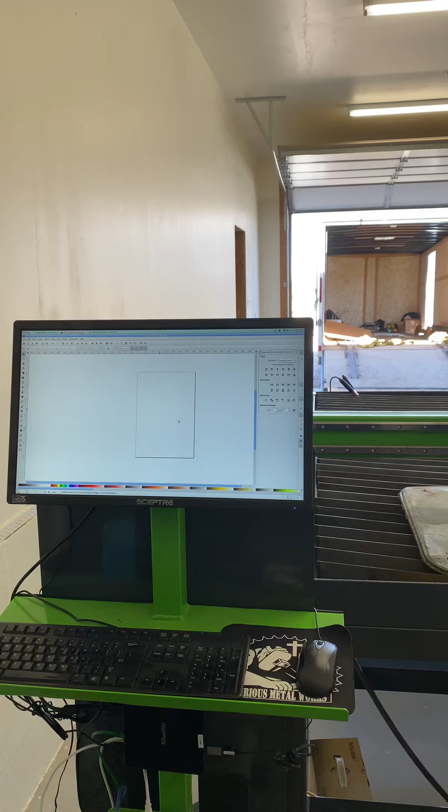All right, so first we're going to go back to drawing. Let's just draw something simple. Grab your square tool, click and drag. It doesn't really matter what it looks like because we're going to go up and dimension it now.

So corner tool, go up to the top. We're going to tell it that we want to cut in inches. Let's just make a 1 inch square. Tab 1, there's your 1 inch square.

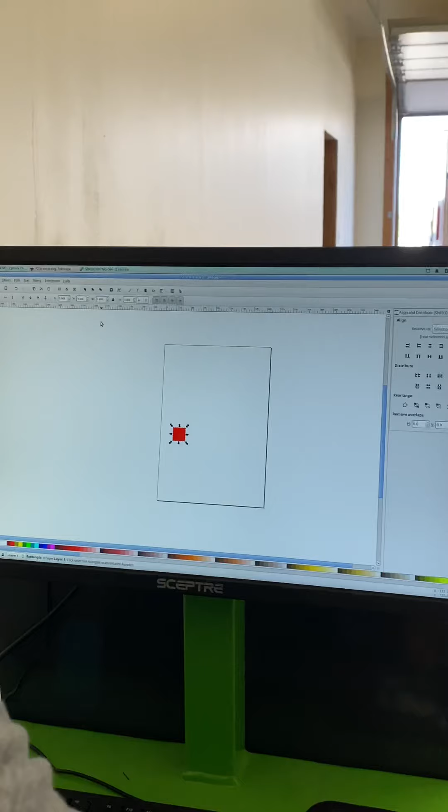And then we'll put a 1/2 inch circle in the middle of it. Grab your circle tool, click and drag, corner tool, width 0.5, height 0.5, enter. Your plus and minus buttons over on the keypad will zoom in and zoom out.

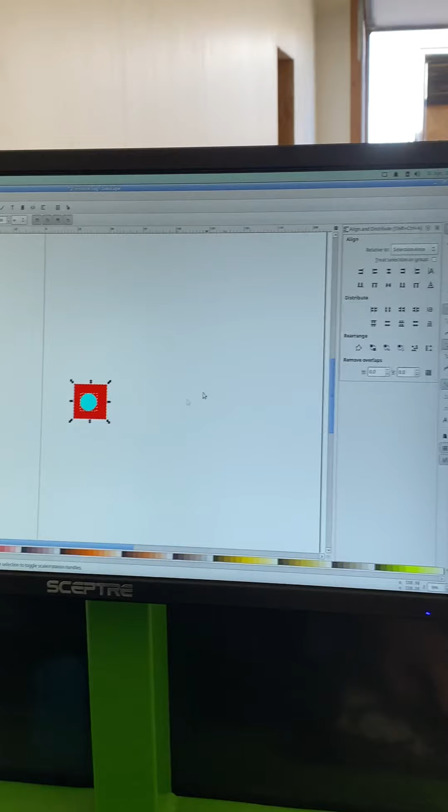Since we have this circle, we're going to change the color of it, make it blue or something else, stick it in the middle, and then we'll draw a box around it. Our align tool is open on the right side, so we're going to center on the vertical axis, center on the horizontal axis. Now it's dead center.

Now we have a 1 by 1 square with a 1/2 inch hole in the middle of it. Go back to File, Save As, and we're saving this in the Plasma Cut Files folder. We're going to name it 1 inch square with hole, .svg. So this is your SVG file, hit save.

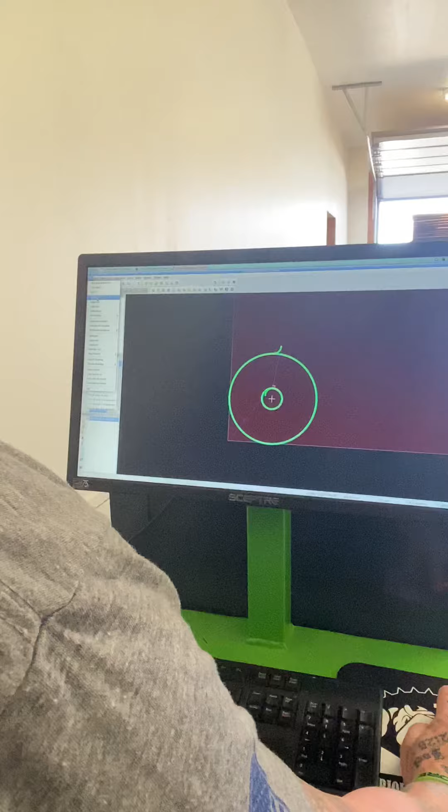Go back to Sheetcam. We'll go to File, New Job, since we're making a new cut. We'll go to File, New Part, and then in Plasma Cut Files, there is your 1 inch square with a hole .svg file. Click it and hit open.

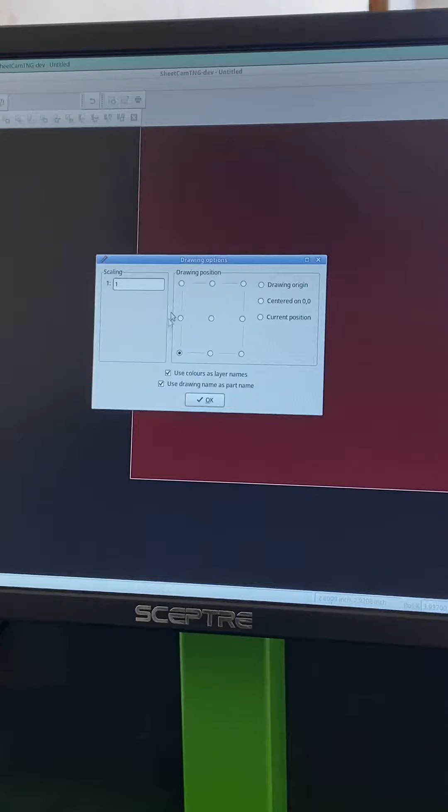This screen asks you where you want to put that part on the plate, on the sheet. We're cutting off the lower left-hand corner. SVG scaling is always 1:1. Hit OK, so there's your part.

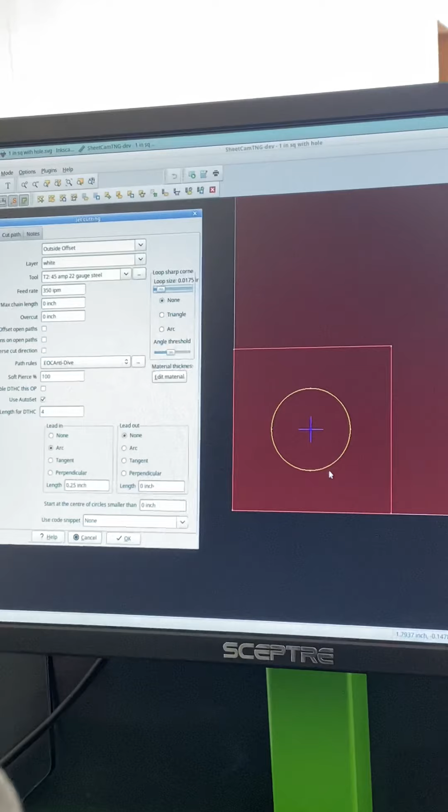Now we're going to go over here to create a new jet cutting operation. We will select outside offset. Sheetcam sees this as 2 parts. The circle's yellow, the square is red. So if you select outside offset, it will automatically do an inside offset on the circle and automatically do an outside offset on the square for you. So we leave it at outside offset.

We'll pick the layer that Sheetcam put it in, which is white. We're cutting 22 gauge steel, so at 45 amps. We need to know what the preset voltage is, so we'll just click this 3 dotted box here. Look over here, it's calling for 128 preset volts. So now you know that number, keep that in the back of your mind.

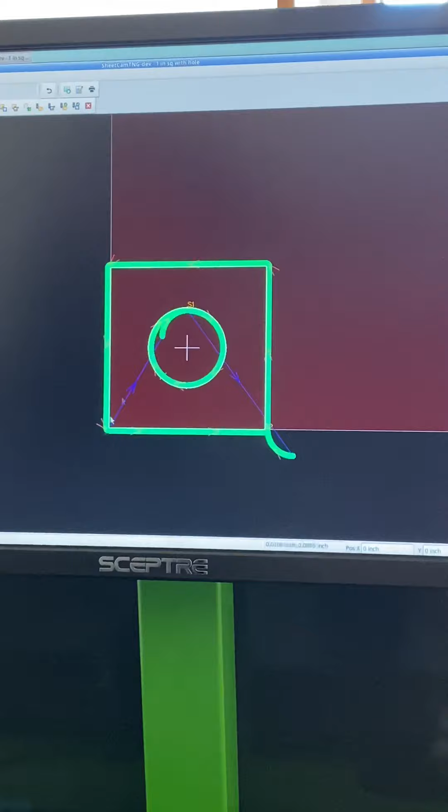Hit OK, here's our cut path. It's going to go from 0, pierce and cut the 1/4 inch lead in for the circle, and then it's going to come over here and do the outside cut.

So now we go to File, Save Job As, and it's a 1 inch square with hole.job. We're saving it in the Plasma Cut Files folder. Hit Save. Last step, play button right up here at the top.

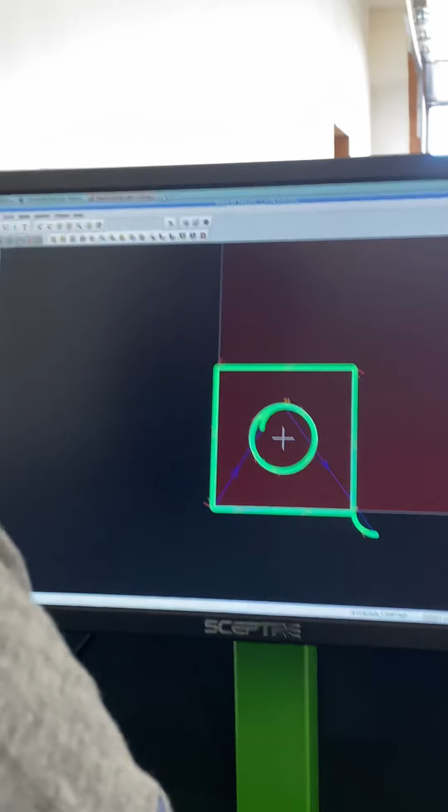Looks like a little play button, you click it. Now we're going to make G-code. So once again, it's a 1 inch square with a hole.ngc. We're saving it in the Plasma Cut Files folder. Hit Save. Post-processing completed, everything's good, so we can hit OK.

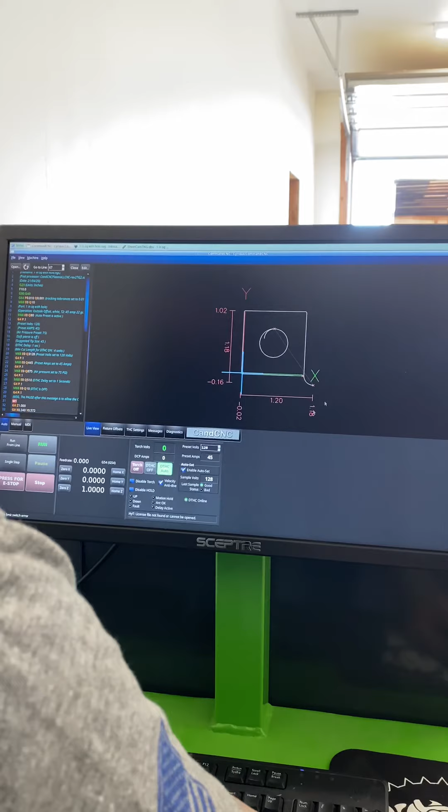Now we'll go back to CandCNC. Open, pick our new NGC file. There's our part. So looking at the plate, we'll move the torch over past the last part we cut. And then with 0x and 0y, now we're ready to go.

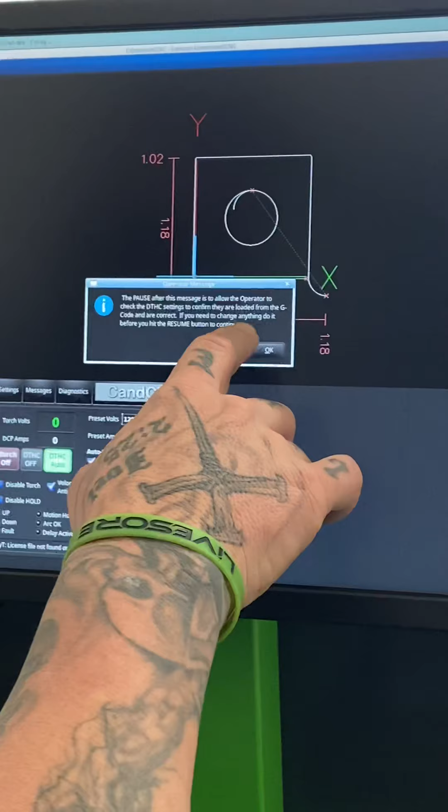So you hit run. As soon as you hit run, this box pops up. This is a message to allow the operator to make sure your DTHC settings are right. With our setup here, preset volts is the number it's looking for. So yes, it changed it to, or it was actually already 128, but that's what you're looking for, 128 volts. Once you know that's right, then you can hit OK, and then resume, and it'll go cut your part.